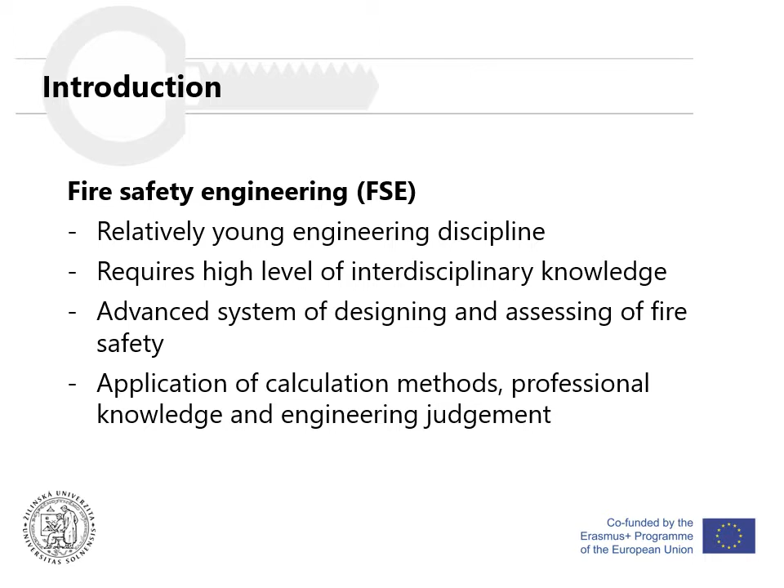Fire safety engineering can be defined in a number of ways. However, the latest edition of ISO 23932 Fire Safety Engineering defines it as the application of engineering methods based on scientific principles to the development or assessment of designs in the built environment, through the analysis of specific fire scenarios or through the quantification of risk for a group of fire scenarios.

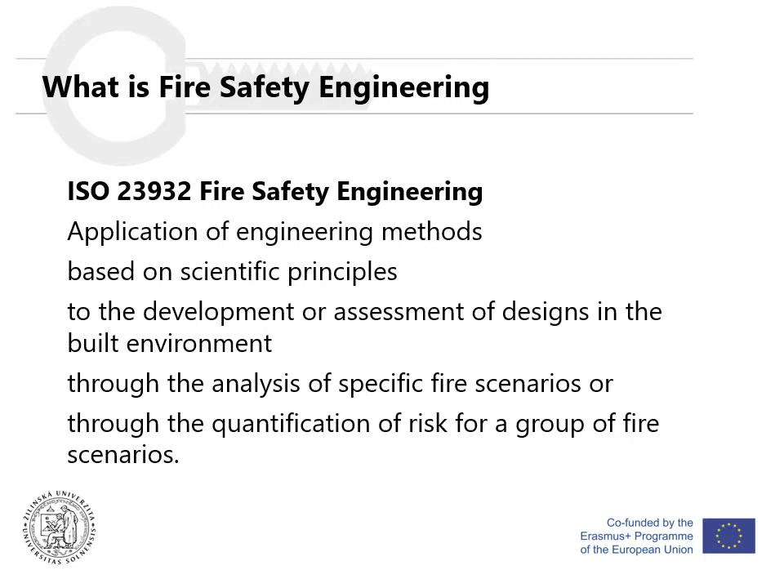When we talk about fire safety engineering, we can say that we always apply a type of fire risk analysis. There are two forms of risk expression in fire safety engineering. The first is implicit, where the risk is hidden, meaning it's not directly expressed in our calculations, and this is usually tied with the deterministic method of fire safety engineering application, where we use the worst reasonable case approach. In the other form, where risk is explicitly treated and directly expressed, we are applying probabilistic or risk assessment approaches.

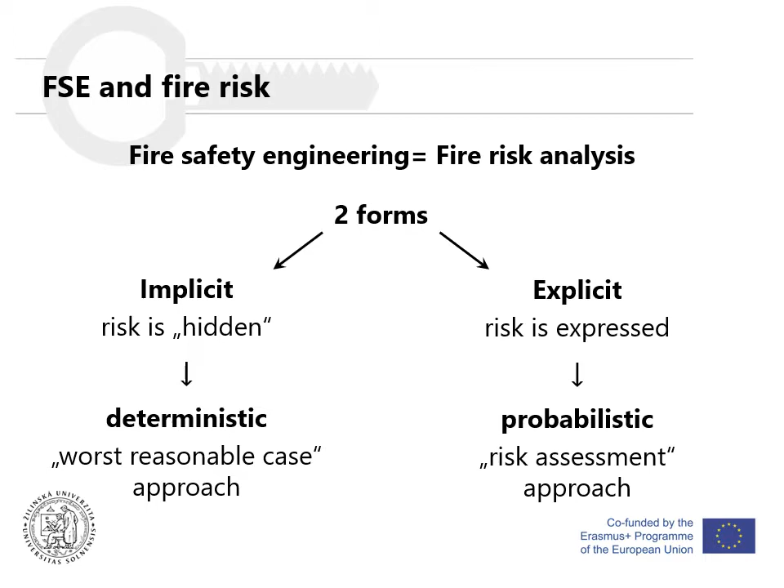When we look at the goals and objectives of fire safety engineering, it's a method of achieving an adequate level of fire safety in cases where the use of prescriptive approaches is not appropriate due to the specificity or complexity of the design at hand. That means applying prescriptive design methods would be either difficult or not possible because of the complexity of the building or the system.

In fire safety engineering, we are not only selecting the methods of design and tools to prove that the design has a sufficient level of fire safety, but we also select and define our fire safety objectives, meaning we are setting our goals for the design and deciding what is safe and what is not. Therefore, there is a risk of inappropriate objective definition, which means we can end up applying or implementing inadequate or insufficient fire protection measures, which essentially will compromise the level of fire safety for such a design.

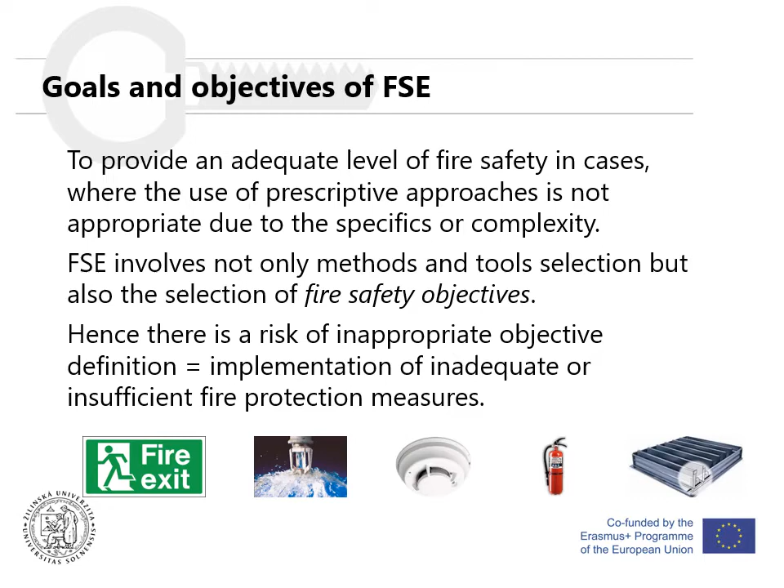The application of fire safety engineering is on the rise due to the use of modern architecture and design, which often requires an innovative approach to fire safety, and the complexity or other specific features of buildings such as high-rise buildings, atria, large open spaces, large assembly places, and so on. All of these require an advanced approach to fire safety design.

Therefore, an increasing number of countries adopt and use fire safety engineering, some of which have already developed their own standards for fire safety engineering. We have the international suite of standards published by ISO, with the main guidance document ISO 23932. Another example is the United Kingdom, with its fire safety engineering standard suite BS 7974, and also the USA, which has a number of fire safety engineering related clauses in its NFPA 101.

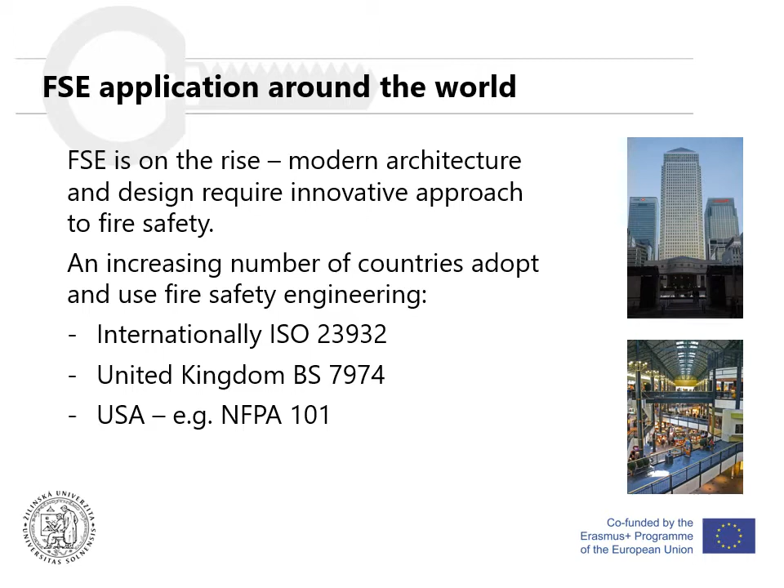ISO 23932 has developed a framework for fire safety engineering application. We can see three main parts of its application. The first part, which covers the project scope, objectives, functional requirements, selection of analysis methods, and identification of performance criteria, is called boundaries of analysis, where we set out the limits of what we're actually going to be designing with the use of fire safety engineering principles.

The second part, shown in the middle, means the evaluation of design through the creation of a fire safety design plan, determination of design scenarios, application of the selected engineering methods, and evaluating if the selected performance criteria have all been satisfied. Once we have proved that our design is safe and all performance criteria have been satisfied, we can then document the design features in the final report, implement it, i.e. build the building and put all systems in place.

And once the building is up and running, we have to execute fire safety management, which focuses on running all the operations fire safe and monitoring any significant changes to the building, its use, or its systems so that we maintain the required level of fire safety throughout the building lifetime.

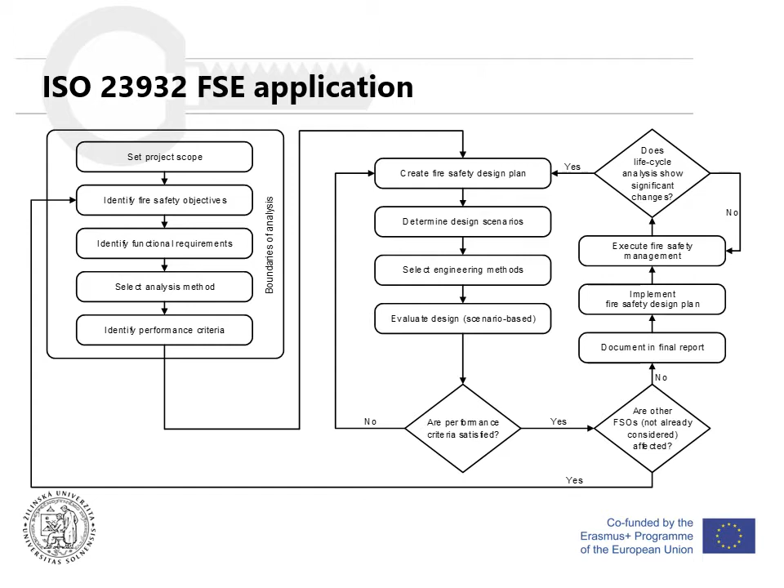When we start with fire safety engineering application, we first need to set and answer a number of questions. First of all, what is the objective of the construction project? Are we building a new building, changing an existing one, extending it, or changing a technology within an existing building?

Subsequently, an important question of why or even if the fire safety engineering approach is required and appropriate. Here we need to answer why the prescriptive approach is not sufficient, or whether the building is too complex or has some specific features which do not allow for the use of a standard prescriptive approach.

What is the scope or extent of the fire safety engineering approach? Are we just justifying a number of deviations from the prescriptive guidance? Are we proving a level of safety for a very specific part of the building or technology?

If it's to be applied to an entire building or a part of it, then we need to identify all of the involved or interested parties, for example the investor, user, public within the neighboring buildings, authority having jurisdiction, insurer, and so on.

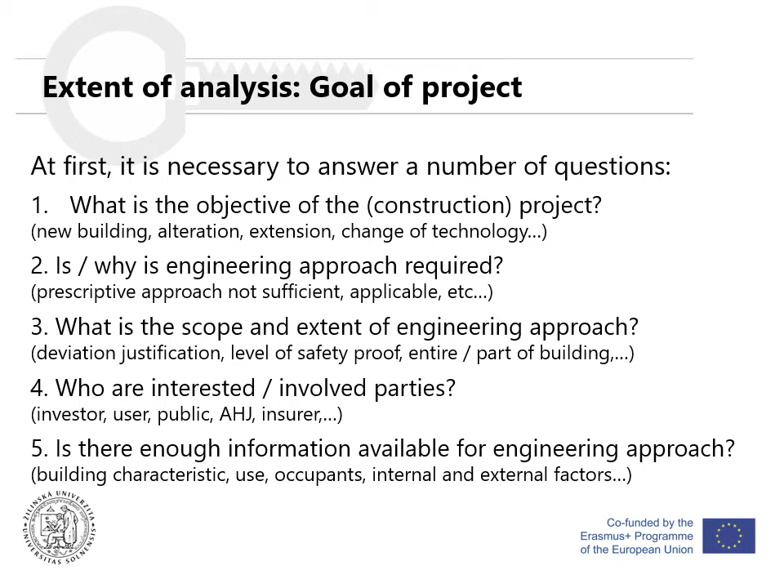As mentioned previously, there are always specific cases or building features that require a fire safety engineering approach. This is usually possible or required in cases such as buildings with atriums, historical buildings, complex and combined use buildings, where we need to closely investigate these specific features alone and in combination with other features of the buildings.

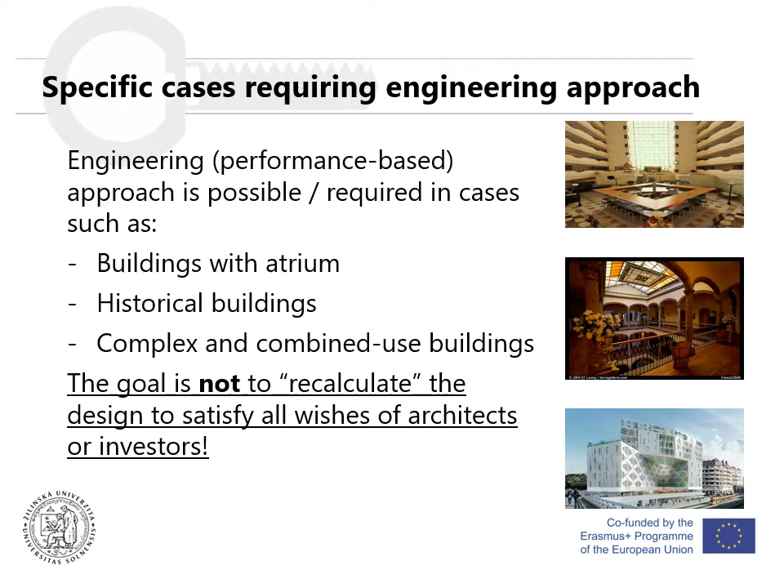We need to look at smoke spread, we need to look at evacuation and analyze these in detail. We need to realize the goal is not to recalculate the design to satisfy all wishes of architects or investors, i.e. to make possible what is not possible under a standard prescriptive approach.

When fire safety engineering is applied, there is a hierarchy of goal definition which is usually applied. The high-level goals are also called fire safety objectives. Then we identify or define functional requirements, which are more detailed elaborations of fire safety objectives.

And finally, we need to define performance or acceptance criteria, which are thresholds or values which we actually use to prove that the functional requirements, and therefore the fire safety objectives, have been satisfied.

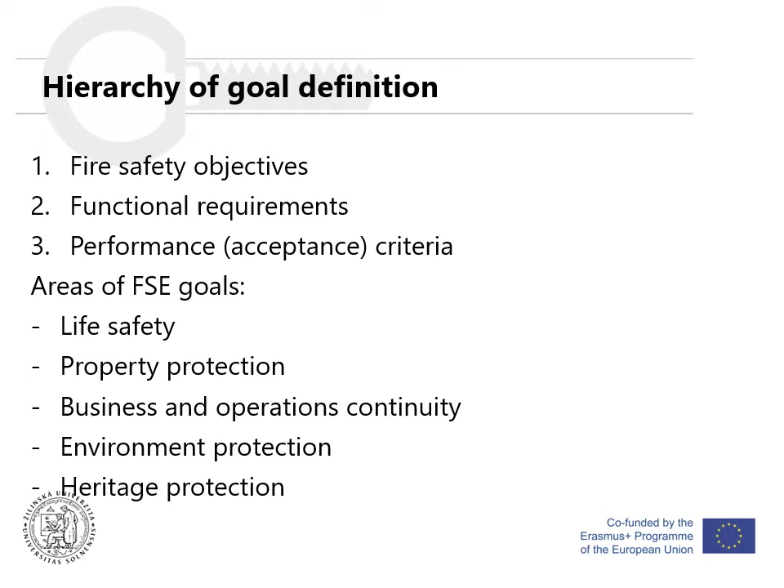We define fire safety goals in a number of areas. Most often we can divide these into 5 groups, such as life safety, property protection, business and operations continuity, environment protection, and heritage protection. We can illustrate the fire safety goal definition on a life safety example.

The high-level fire safety objective may be defined as follows: the fire safety design shall be such that fire-related injuries to occupants away from the immediate areas of fire origin are minimized. That means we try to protect everyone that is not in the very close vicinity of the fire.

This may be further broken down into a number of functional requirements, an example of which may be that the occupants are not exposed to untenable conditions due to elevated temperatures, radiation, toxic species, irritant species, or reduced visibility while moving along the paths of egress.

This means that we try to protect, or we must protect, the occupants while evacuating by creating tenable conditions. These tenable conditions are then quantified through performance criteria, which we may set as follows: the analysis method is the deterministic analysis, and performance criteria corresponding to conservative estimates are chosen.

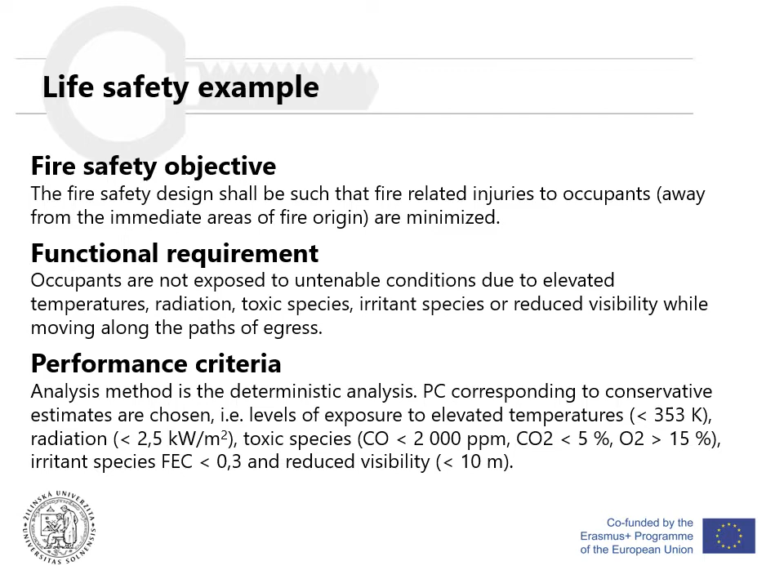The level of exposure to elevated temperatures, radiation, and toxic species are set as shown on the screen. These values must not be exceeded in our design evaluation, and if we satisfy these performance criteria, we may consider the means of escape safe for the entire duration of evaluation.

In order to evaluate our fire safety design properly, we need to select an appropriate analysis approach. The main two approaches, as seen in the figure, are comparative and absolute. Each of these can use a number of analysis methods: qualitative, deterministic, and quantitative. These will be presented in subsequent slides.

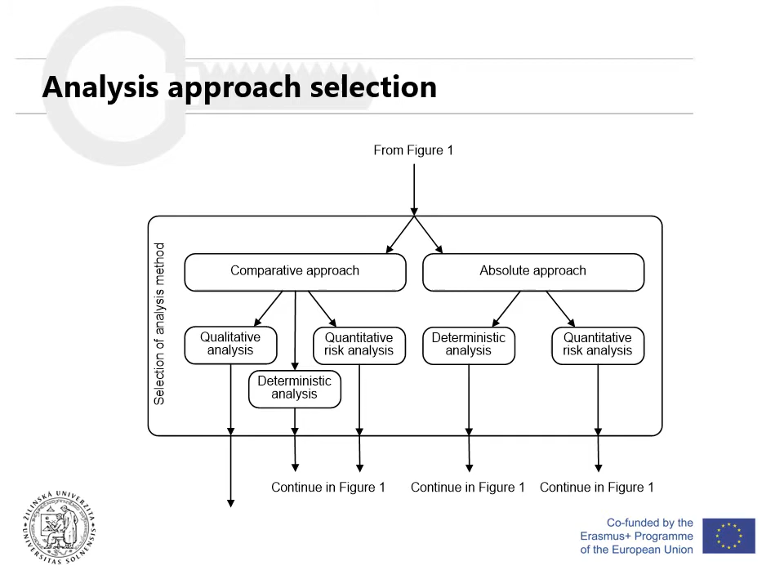The first step we need to take is the decision about the comparative or absolute approach we're going to use in our design. Comparative approach means that we have a baseline design which fulfills all the applicable prescriptive requirements, and against this design we assess our engineered design. This means we assume fire risk is tolerable when all the prescriptive requirements are fulfilled, and therefore it's always necessary to have two designs: one, the baseline, against which we compare our engineered design.

On the other hand, in the absolute approach, we consider design acceptable if all of the approved performance criteria are met, which means we assume fire risk is tolerable when the defined performance criteria are met. Therefore, it's necessary to have a set of clearly identified tolerable risk criteria, and we need to express these through numerical values known as performance criteria.

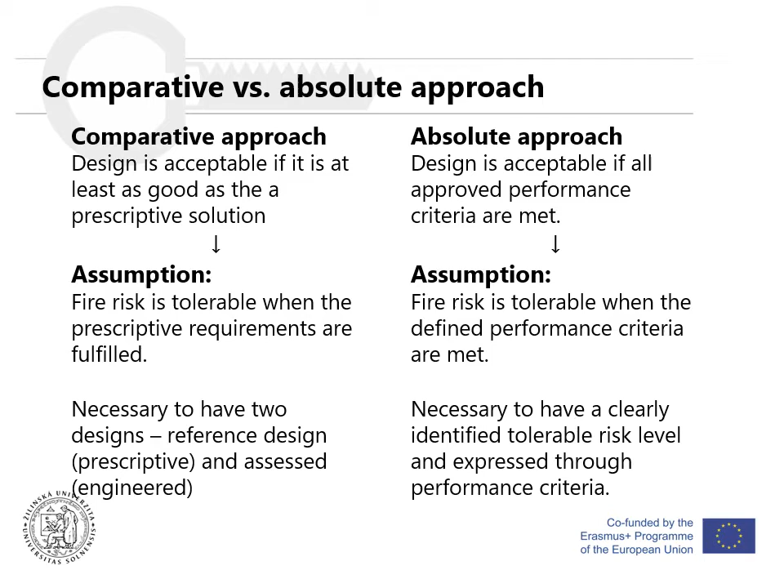Qualitative analysis is a special, simple, comparative analysis which is only applicable for small deviations from prescriptive requirements. Therefore, it's always necessary to compare our design against a compliant prescriptive design and assess if the small deviations identified have been sufficiently compensated. Risk is treated implicitly in this case, and deviations always have to be compensated for by additional fire protection measures. It's also necessary to assess the impact of all deviations on all fire safety objectives.

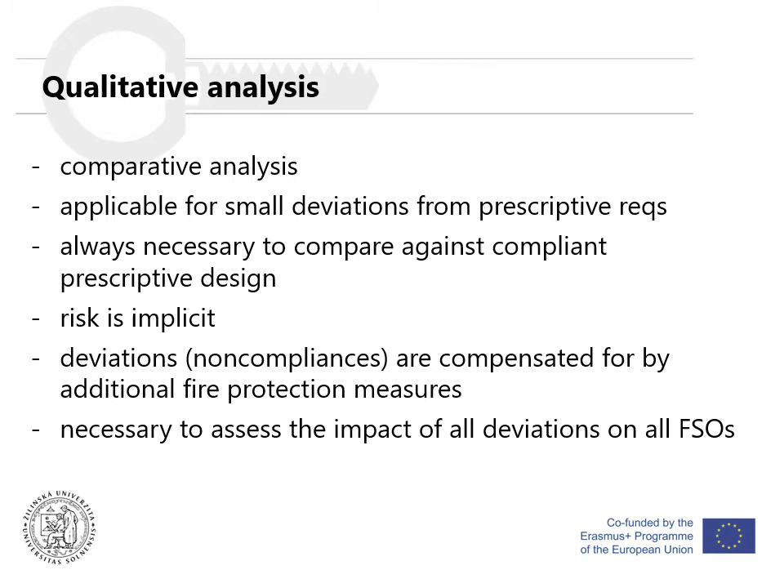Even if the connection is not clear from the beginning, we always need to do this. The following matrix shows a possible way of evaluating the impact of one affected fire safety objective or fire safety measure on other ones. We may see that there may be primary, secondary, or even tertiary bonds between the objectives.

For example, extending escape routes has impact not only on the actual escape, but also on access for firefighters, and these prolonged distances may cause difficulties from the firefighting perspective. This way, we always need to check against every potentially affected objective and see whether or not the deviation has been compensated for sufficiently.

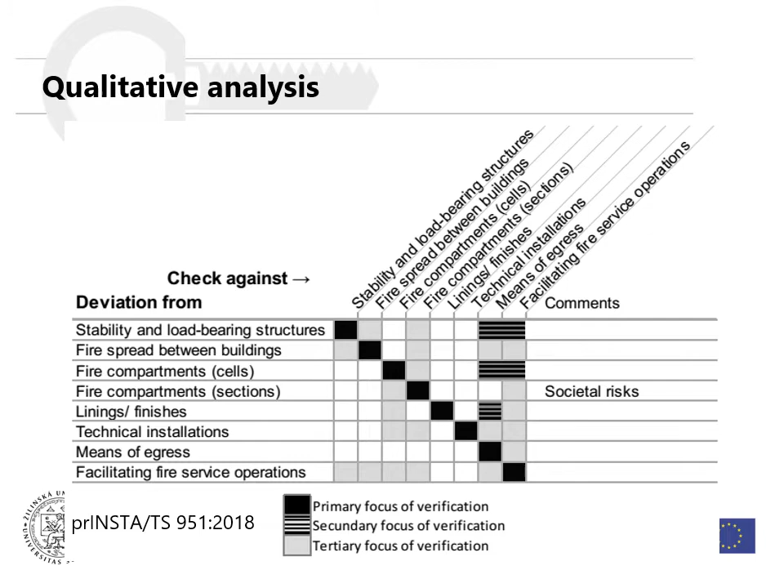The deterministic analysis is a more advanced calculation analysis. It can be used in a comparative or absolute approach. The risk is expressed implicitly through the use of worst credible case scenarios. These worst credible case scenarios are considered the potential worst situation that may occur, given a reasonable probability of their occurrence.

We therefore need to identify all relevant scenarios from the perspective of the defined fire safety objective. There is no such thing as a universally applicable worst credible case scenario, and we always need to identify the worst case scenario for evacuation, for structural evaluation, for firefighting access, and so on. We have a wide spectrum of analytical tools available, from simple calculation methods, for example for detection and activation, all the way to advanced computational fluid dynamics fire models.

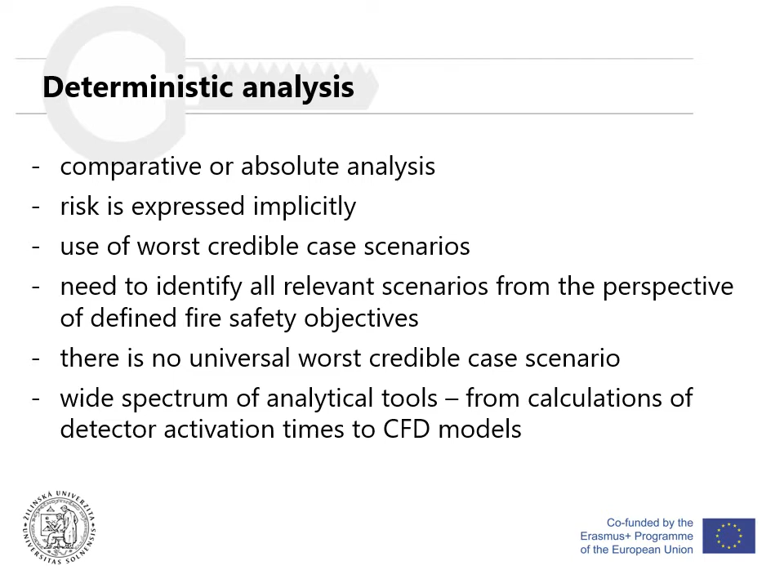Probabilistic analysis is the most advanced approach to risk analysis. It can again be used for a comparative or absolute approach, and risk in this case is expressed explicitly. We can divide it into semi-quantitative or quantitative risk analysis methods, where semi-quantitative methods have a broader definition of design scenarios, and part of the risk is usually expressed quantitatively while the other part or component, probability or consequence, is expressed qualitatively. Quantitative probabilistic analysis is the highest level of fire risk analysis.

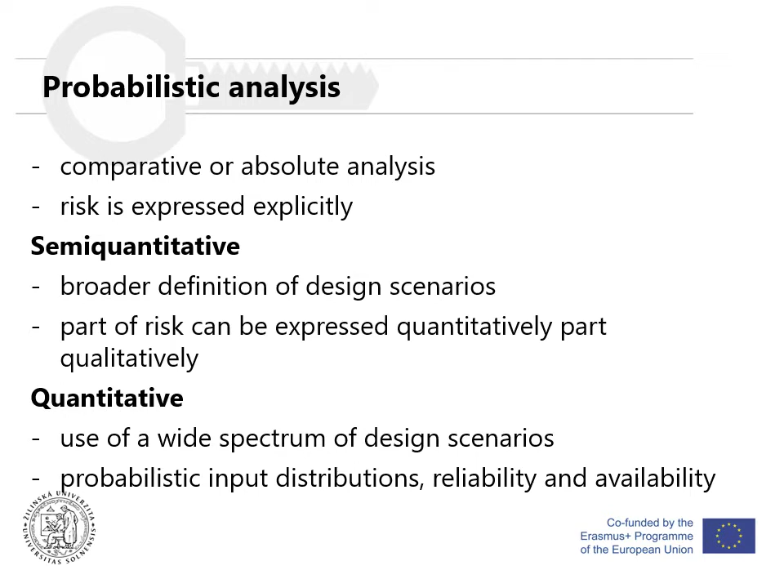The main feature is the analysis of as wide a spectrum of design scenarios as possible, and therefore we usually apply probabilistic input distributions, reliability, availability, and uncertainty treatments. The calculations are quite complex, and therefore we need to specify the limits and the scope of application of such analysis.

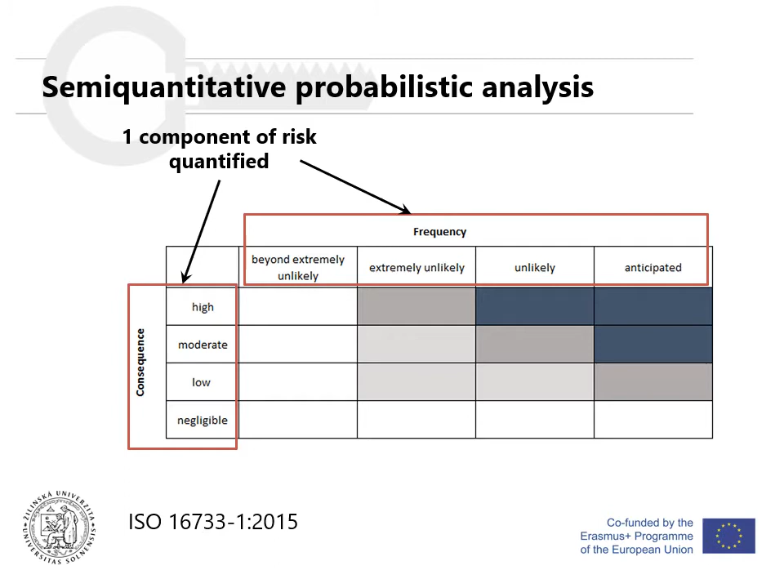This slide shows how one of the components of risk may be quantified. We change either the frequency or consequence descriptors into a numerical value, which can be either a point value or a range, to which we assess a group of scenarios.

Fire safety design plan is a starting point for definition and assessment of fire scenarios. Due to occupancy and use specifics, the plan should contain information and design elements in a number of categories, shown as follows: fire initiation and effluent production, fire and effluent spread, constructions and compartmentation, detection, activation and suppression, occupant characteristics and evacuation, and firefighting action if relevant.

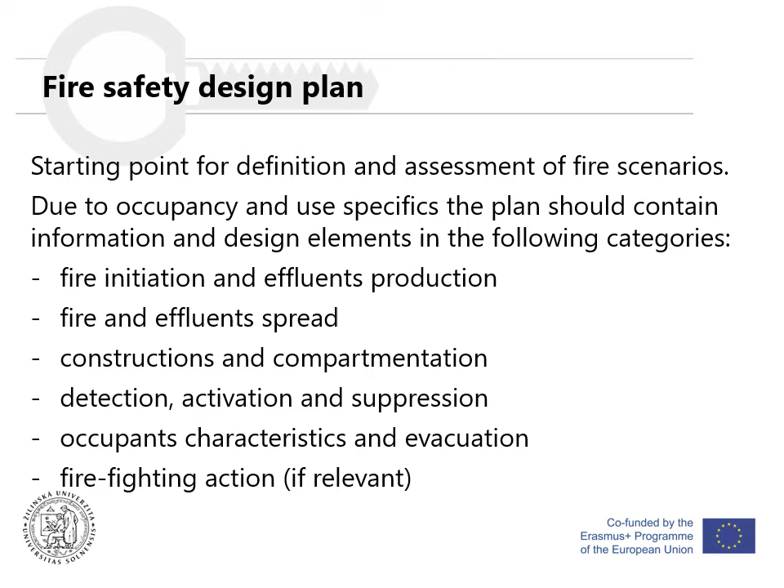All of these will be used in formulation of our design scenarios and evaluated at a later stage. There are two categories of design scenarios: one concerning fires, we have design fire scenarios, and the other concerning humans and their behavior, which we name design behavioral scenarios.

For design scenario specification, the first step is fire hazard identification, where the following specifics are considered: internal factors, comprising building occupancy type, processes and activities, construction and materials, equipment and furnishings, systems and technologies, fire protection and other systems; and external factors, which usually comprise neighboring buildings, environmental hazards, and other factors that may affect the development of the design fire scenario from the external perspective.

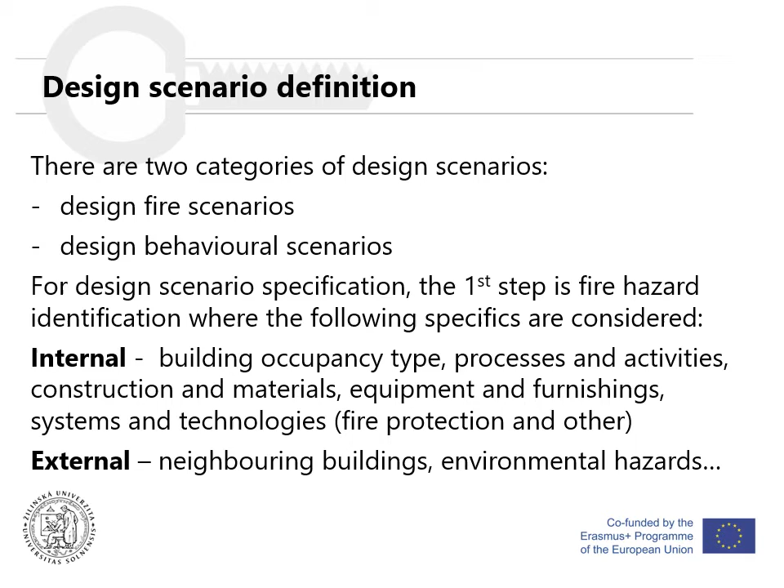In this figure, we may see the process of fire hazard identification. We can see that part of the hazards can be addressed through prevention and the other part through mitigation measures. The hazards are divided in chronological order, from even before the fire starts, then ignition and fuel hazards, enabling hazards which may worsen the fire conditions, and vulnerability hazards which concern the vulnerability of people, structure, and other parts of the design or the exposed targets which may suffer from fire.

Subsequently we can arrive at the fire impact, i.e. outcomes, which is usually characterized through injuries, property damage, business interruption, or environmental damage.

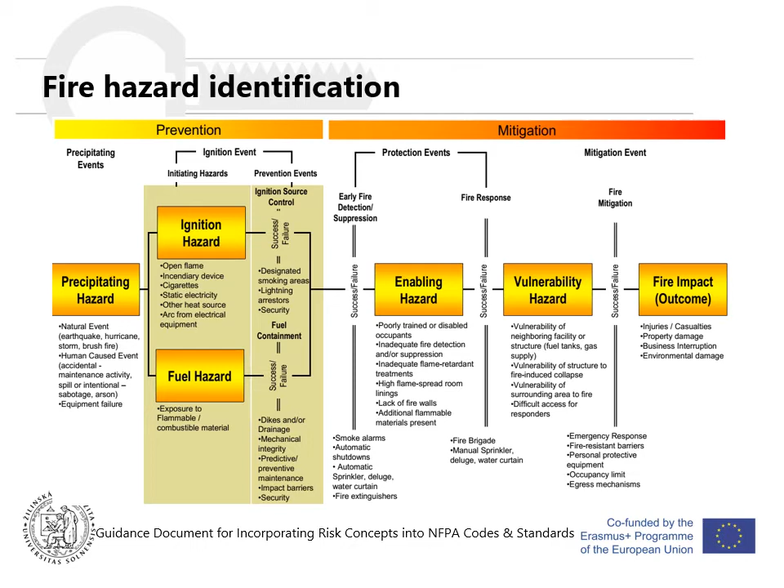Fire scenario definition is a two-step process. In the first step, we describe our fire scenario qualitatively. This is described in ISO 16733 Part 1, and it concerns identification and characterization of the aspects affecting fire development. So we put together our fire scenario as a number of steps in the effect of fire enabling and fire bearing elements that will then create our fire scenario.

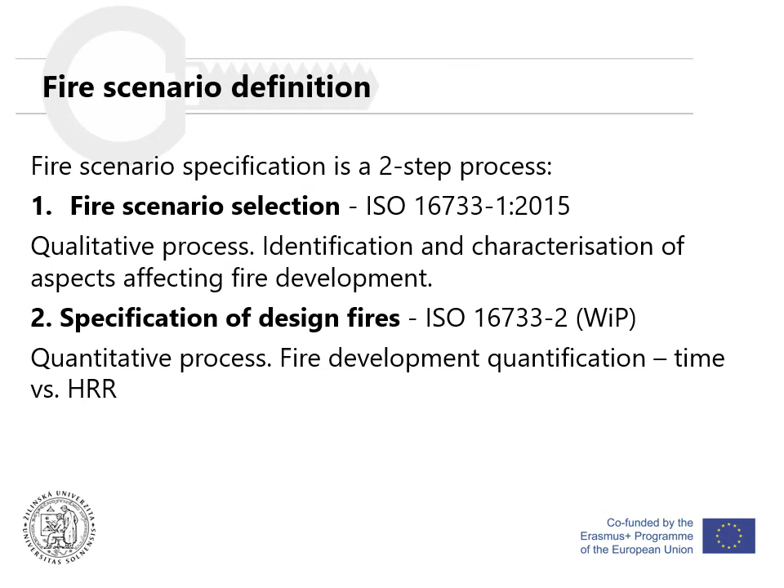In the second step, we have to specify our design fire, which is the quantification of our qualitatively described fire scenario. This means assessing or attributing a specific course of development of heat release rate or temperature profiles with time. This procedure is described in ISO 16733 Part 2, which is currently under development.

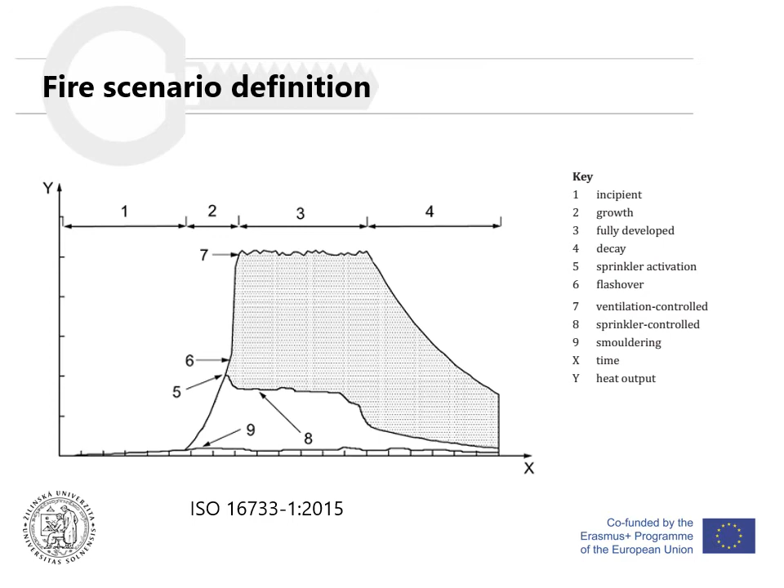Behavioral scenarios, on the other hand, are concerned primarily with persons and their behavior in fire conditions. ISO Technical Report 16738 from 2009 recommends considering the following elements.

Primarily persons, from the perspective of their number and distribution, whether these people are awake and familiar, and what their mobility is, how they will evacuate from the building, if they need assistance, what the expected movement speed will be, and so on. Then also the building systems that may promote or affect the evacuation.

This means, for example, the detection and alarm system, fire safety management and training, and spatial configuration, which may either help or complicate the evacuation depending on the actual configuration. And also the fire scenarios, meaning fire development and effluent characteristics, that is, concentrations of toxic gases or smoke produced and its impact on visibility and walking speed reduction.

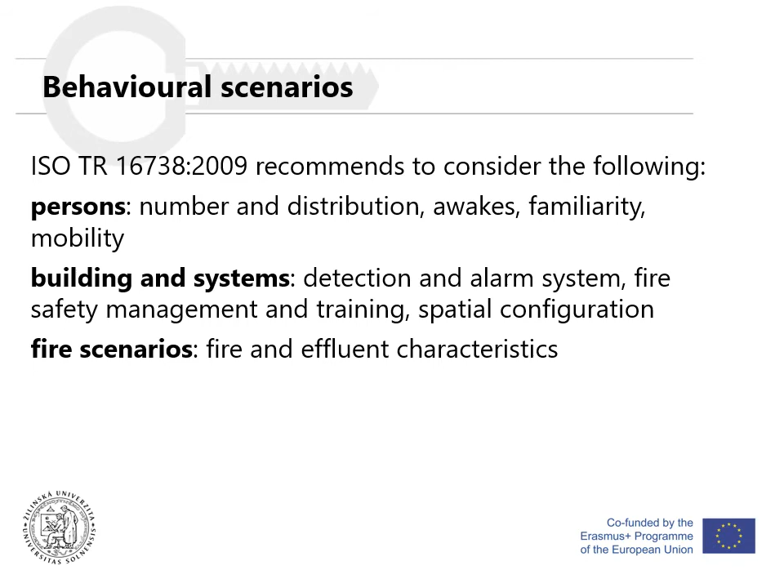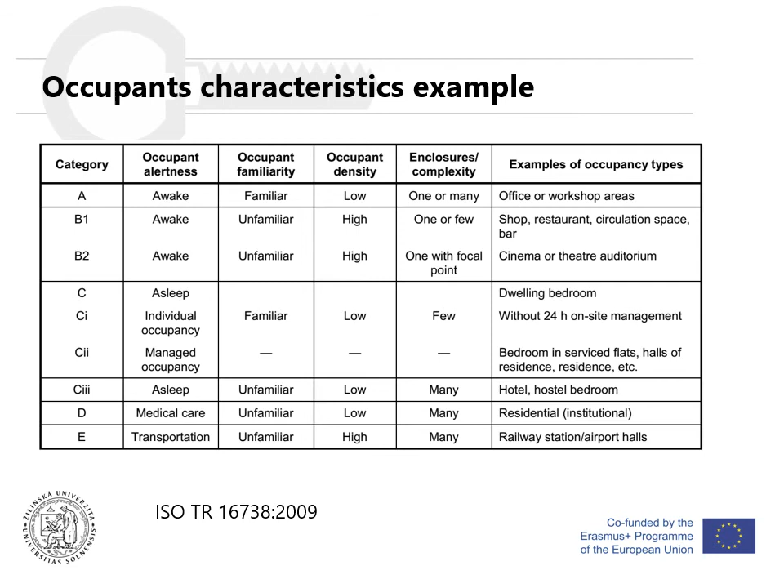In the last column we can see a number of examples for this type of occupancy. As mentioned previously, we have a number of tools available in fire safety engineering, ranging from simple hand calculations through computer models, probabilistic studies and calculations, and experimental methods, which all may be used for evaluating different parts of fire safety engineering design.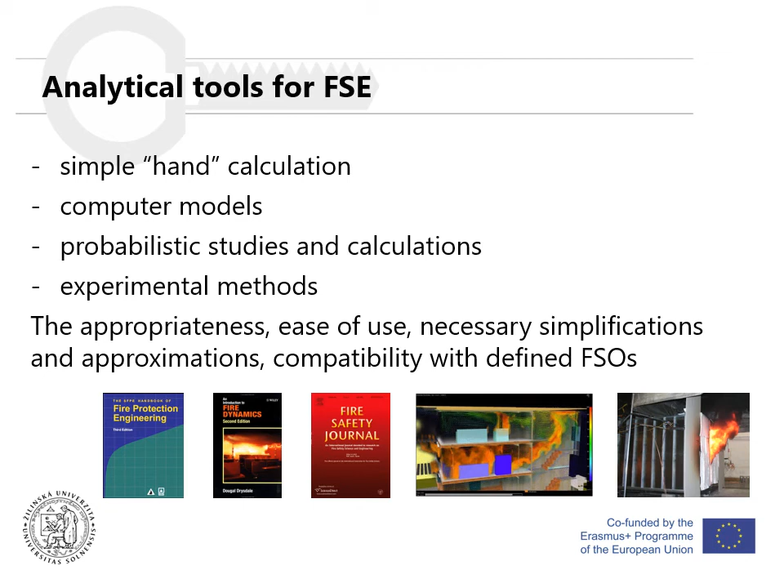This doesn't mean that we will always use the entire range. This depends on the complexity of the jobs we have to do, and also the appropriateness, ease of use, necessary simplification and approximations, compatibility with the defined fire safety objectives, and other factors that will affect the applicability of these different tools. You can also see a number of examples of books, journals, and the computer models and experiments that may be performed as part of fire safety engineering.

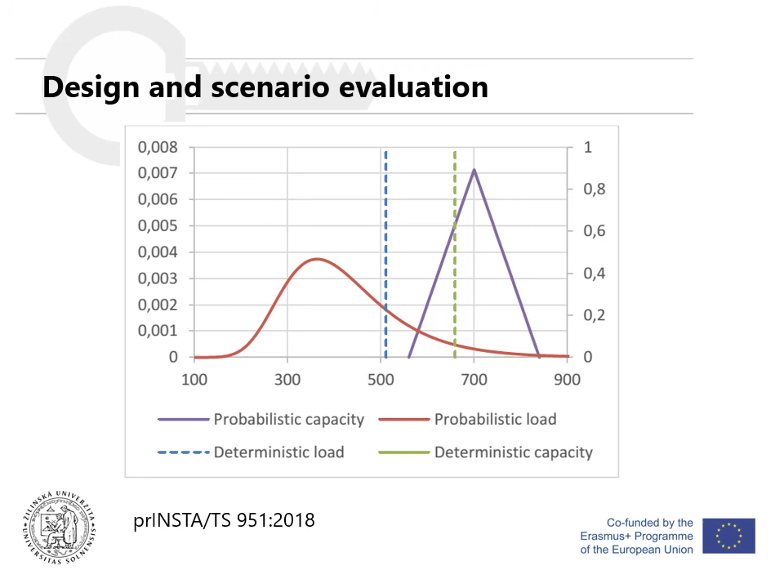Once we have evaluated all our design scenarios and proven that all of our fire safety objectives, functional requirements, and performance criteria are met, we can move to documentation of the fire safety engineering design. Here we need to employ a detailed approach, providing all the necessary information in the right extent and format. That doesn't mean putting everything into one document, but it needs structure and must highlight the right amount of information in the right places. We always need to describe and justify why such conditions and input parameters have been used, what they mean, and how they affect the overall level of safety.

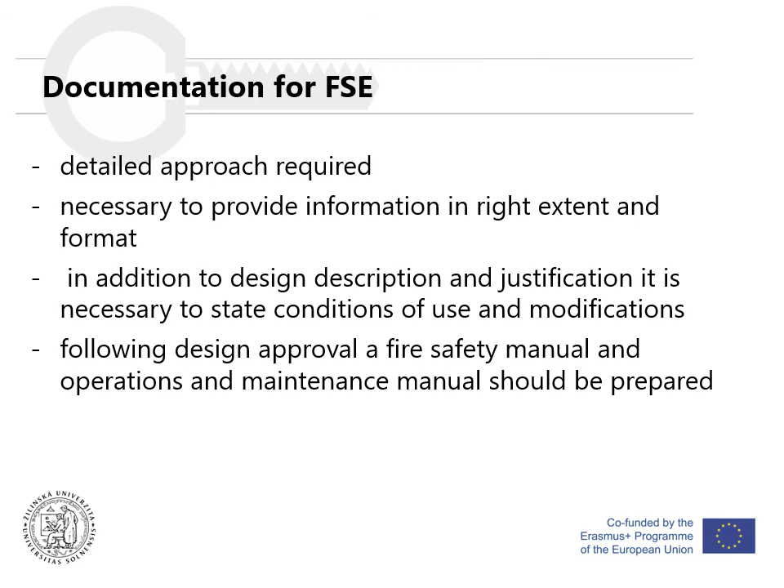Once our design is approved, we can move to the creation of a fire safety manual and operation and maintenance manual, which are the base documents for the actual lifetime of the building, for its actual use and fire safe use. The final step in fire safety engineering is the implementation and fire safety management of our design.

After the building or system has been constructed and installed, it is necessary to check the functionality of the individual fire protection systems and features, both individually and in combination, to prove that the design as a whole functions properly and performs all the functions required. We therefore need to introduce proper and thorough testing before handover, to make sure that before the building or the technology is open and running, we are sure everything functions properly.

Subsequently, we need to employ a sound inspection and maintenance program to constantly check if all our systems and fire safety features are in place and performing their function as required. We also need to keep our fire safety documentation live and up to date, to monitor and record all changes and modifications.

This is particularly true for fire safety engineering designs, which must be properly consulted with a fire safety engineer and assessed in the context of their impact on the overall design, because even a small change may significantly impact the overall performance of the fire safety engineering design. We also need to periodically check the sum effect of so-called negligible changes, because a number of small or negligible changes added together may constitute a significant change and invalidate our design significantly.

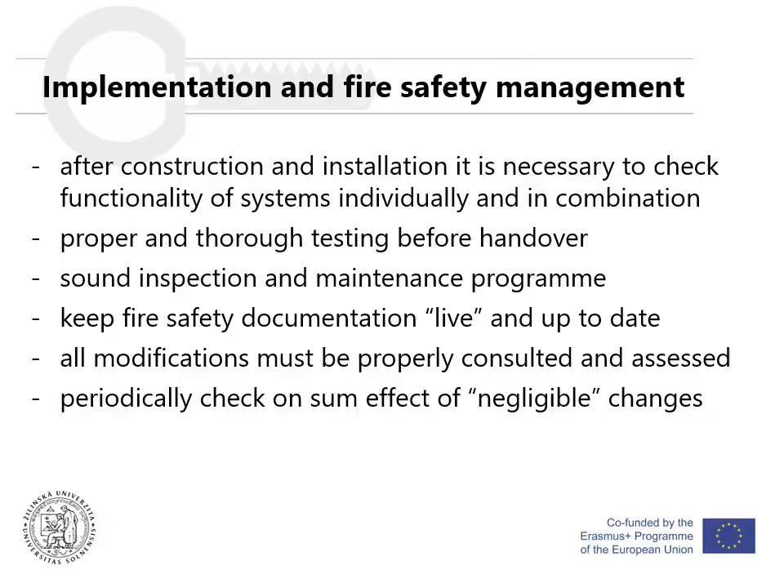This concludes the presentation about the application and principles of fire safety engineering, and I thank you for your attention.